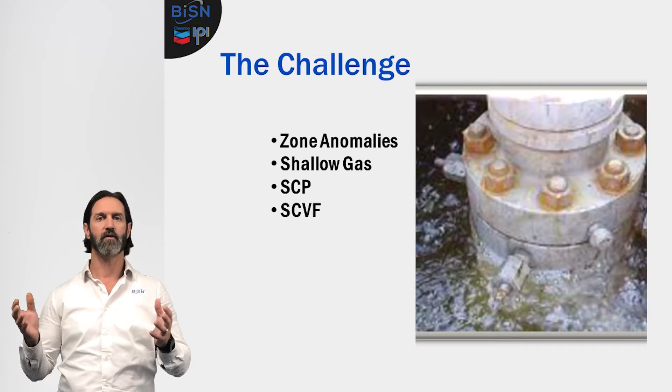And the biggest challenge we were faced with was they were having shallow gas zone anomalies, as they know it, sustained casing pressure, surface vent flow. It's known by many names around the world, but it's basically gas migration or bubbles coming up through a cemented annuli. And we're going to talk today about how we approached this a little bit differently than your traditional methods.

So let's first talk about the conventional method before we get into the novel approach that we're going to speak about today. So conventional methods use long section mill windows, typically plus 100 feet or 30 meters, to enable you to put a 30 meter or 100 foot cement plug in place. So section milling these long windows takes a lot of time, generates a lot of swarf. There's a lot of disposal, so there's costs associated with that as well as HSE hazards.

And there's also a lot of complications that can come along with that. So one, you can get stuck in the hole. The longer the window is, the higher likelihood there is of breaking the blades, sticking something in there, getting extended time, and as we all know, time is money.

So after section milling this long window, the traditional conventional method would be to set a mechanical bridge plug inside the inner casing. So what that does is it's very restricted. A mechanical bridge plug is designed for a certain type of casing, a certain size, a certain weight. It doesn't have a lot of variability with it. It also has limited contact areas.

You're putting a lot of stress on one part of the casing as opposed to extending that out over long regions or long lengths of the casing, which can cause potential casing damage. And you're abandoning this well, you already have gas coming up the backside. The last thing you want to do is cause more problems by damaging your casing.

The last step in the conventional method is putting in cement. And we all know the downfalls of cement as a barrier material or a P&A material. It's very porous, it shrinks, it develops cracks over time, and there's typically a very long wait on cement time, between 12 to 24 hours, depending on what additives you had. So as you see in the photo, you just can't trust cement.

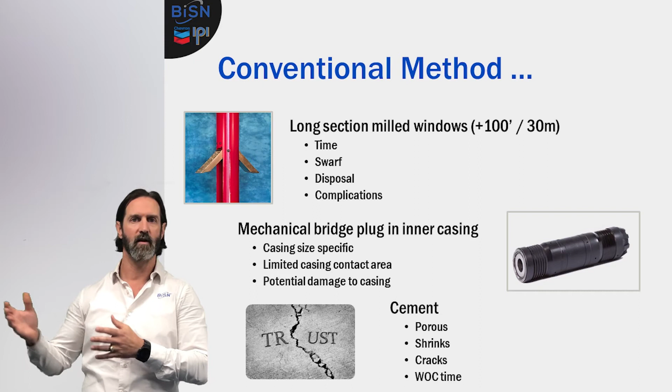Thanks, Jeff. For this P&A campaign, we have used the IPI Permanent Inflatable Bridge Plug, PIBP, and the plug itself consists of three main sections. The top section consists of the releasing mechanism, either left hand thread or shear disconnect, or even a pressure release. Then comes the middle section, which is the tool valving system. It has two spools, or we can even call them valves.

The opening valve, which protects the packer from premature inflation, and also the closing valve, which shuts in on the inflation pressure for a permanent seal. After packer setting, these two valves will provide a redundant seal on the inflation pressure for permanent abandonment.

The third and last section of the tool is the packer element. It's 1.6 meters in length, and its construction features the DuraGrip external anchoring band, the band which we can see on the drawing on each side of the packer element. And this DuraGrip is designed to maximize anchoring for optimal differential pressure holding capability while maintaining an effective bidirectional seal.

Unlike the mechanical packers, which are casing specific, IPI inflatable packers cover a wide range of casing internal diameters. It can be run and also retrieved through restrictions, as the packer itself retracts to its original OD after deflation.

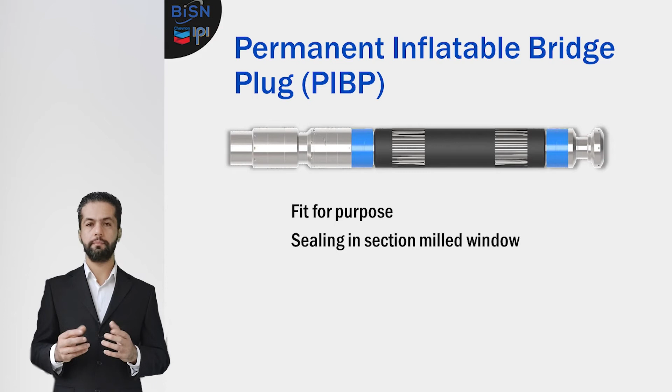Thank you, Adam. So you've heard a little bit about the IPI Packers. The other material that we're going to be using in this novel approach would be the bismuth alloy plugs provided by BISN.

So I said bismuth alloys because we do use bismuth as the main component of these different plugs, the alternative to cement. And some of the unique properties of bismuth is it's a eutectic material, meaning it solidifies and melts at basically the same temperature, a very sharp melting solidification point, meaning it's either solid or liquid. It doesn't go through the gel phase. It also has a viscosity very similar to water and has a very high density with a specific gravity of 10, so 10 times heavier than water.

The combination of those two allow us to run these tools on electric line. You don't have to pump, you don't have to displace. You can go out there with a wireline unit, again, saving cost, less HSE risk, less personnel on location, and then run these plugs and create these gas tight barriers.

They're corrosion resistant, not affected by H2S or CO2, and probably the best quality is they expand like water when it turns to ice when they go from a liquid back to a solid. So remember we talked about the cement, very porous and shrinks on solidification. Bismuth alloys actually expand on solidification and have zero porosity.

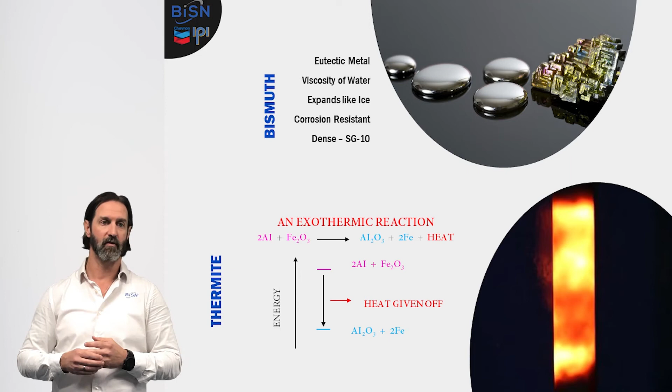The way we get these from a solid to a liquid then back to a solid again is we melt them down using an exothermic chemical reaction, a modified version of thermite, as you can see there. So the best way to describe the BISN tools is like a big candle. The way they're constructed is we have our chemical reaction heater, and then we cast a bismuth alloy on the outside. You can see in this video, the part sticking up is the heater, and the alloy is the silver part that's on the outside.

This is in a piece of glass casing, so you can actually see how one of these tools would set down in your well. So it's like a big candle. The heater is the wick, and the alloy is the wax. What happens when you light a candle? As you can see, the heater starts burning down just like the wick of a candle.

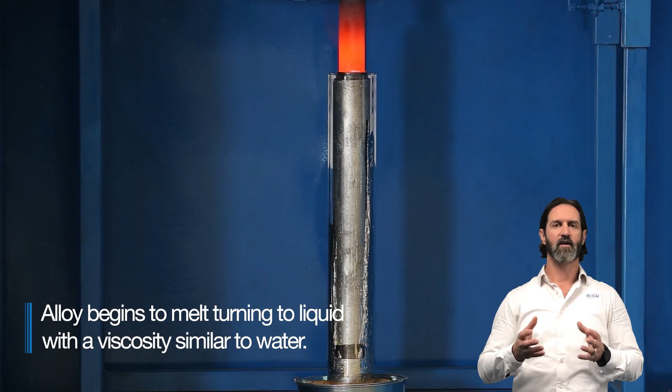Then as it reaches the top of the alloy, that alloy begins to melt and drip down the side of the candle. You'll notice that all of it doesn't run to the bottom. A lot of it stops on the side of the tool, just like a candle would. That's that eutectic property, making it solidify very quickly. It then continues to burn down, continues to remelt until you have all of the alloy left at the bottom of the heater, and that's where your plug is actually being formed.

So in this particular video, the heater is still in place, but for our P&A plugs and what we did in all of these wells for Chevron, we actually extract that heater out of the core when it's in the liquid form, leaving a solid alloy-only barrier, meeting the NORSOK D-010 requirements of a single material plug. Now that you know about the two materials, the technology we use for this campaign, let's talk a little bit about the campaign itself.

So this was done for Chevron, as you're probably aware with George being here, on the Australian Northwest Shelf. It was a total of 34 wells during this campaign. There were 19 onshore wells, and we say onshore, they actually were more like offshore wells because they were on remote Thevenard Island. The logistics were like going offshore as far as getting all personnel and equipment out there. And then another 15 wells on a platform.

Each one of these had zone anomalies and gas migration coming through them. They had limited success in previous campaigns going out with the conventional method that we spoke about earlier. So they chose BISN and IPI to try to optimize the P&A solution and come out with a better result of actually stopping this gas migration.

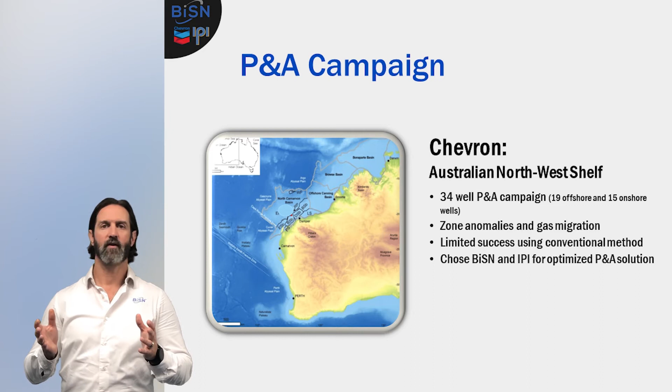So now next we'll talk about the method itself and how we actually got to this solution. We've talked a little bit about the BISN technology itself. We've talked about the IPI packer and the conventional method. We've also in the previous slide gone over what the campaign looked like, how many wells, where they were, what the problems were. So we're going to talk a little bit about the alternative method.

And as you can see on the left-hand side, this is just a schematic representing cemented annuli, with the red lines running through it being gas that's percolating through the cement, basically what we're here to address. On the right, you'll see it is a section mill, much like the conventional method.

However, unlike the conventional method, this window is significantly shorter. We were able to reduce that from a minimum 30-meter window down to a 6-meter window. That 6-meter window was enough to accommodate the IPI packer and the much shortened BISN plug, which is 1.5 meters, compared to the 30 meters of cement required for the conventional method.

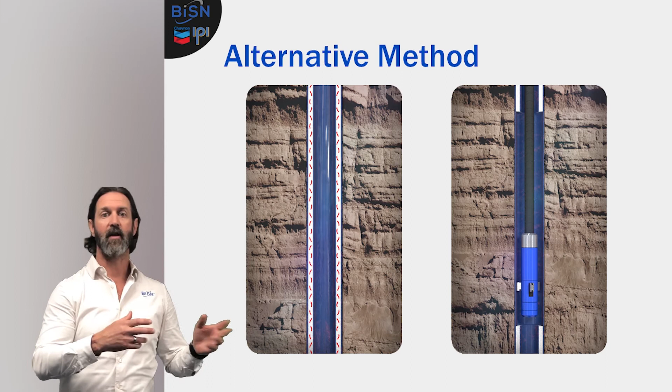So with that, I'm going to hand back over to Adam to talk to you a little bit about the IPI packer itself. Thanks, Jeff.

As it has been mentioned earlier, unlike the traditional method of milling a long section window, then setting a cement bridge plug, this collaborative approach which we have used for this campaign requires a window of just plus or minus 6 meters. Then the inflatable packer can be deployed on drill pipes at the bottom of the section milled window. Then it can be inflated from surface by applying the required pressure sequence.

Once the packer is inflated, we can verify if it's fully set and anchoring by picking up and slacking off weight. And once the packer setting indications are verified, then we finally can release the drill pipes from the packer by rotating the string.

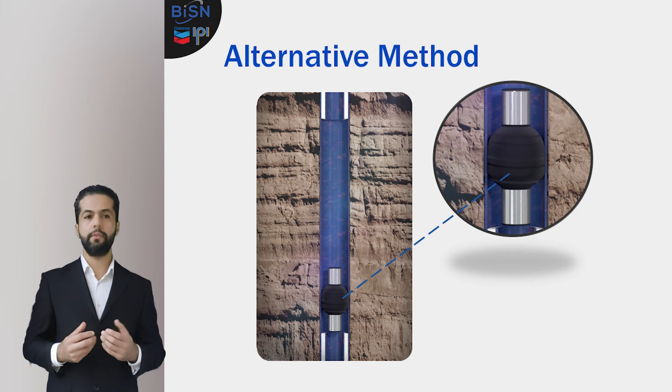We also have the option to deflate the packer prior to disconnecting from the drill pipes if it was, for example, set at the wrong setting depth or for any unforeseen operational reasons. This can be achieved by applying the required pressure to activate the emergency deflate system and deflate the element. After deflation, the packer element will retract to its original OD and it can be retrieved to surface through the section milled window or through any restriction.

All right, so the window has been cut. The IPI packer has been set inside that window, as you've seen. The next step was to take bismuth alloy beads and drop them down the well on top of the IPI packer. So this does a few things. One, it fills in the void. So the IPI packer has quite a long fishing neck.

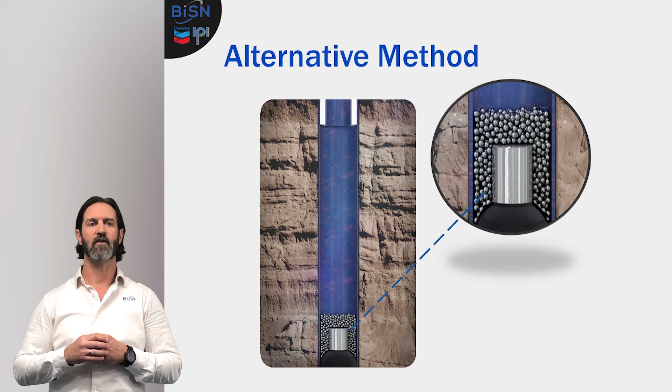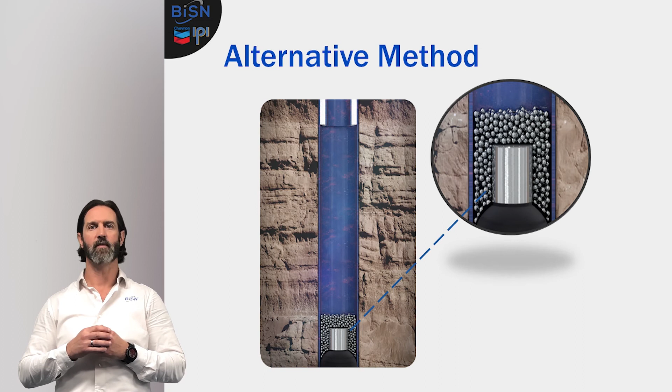And so what we want to do is maximize the alloy we send down in the plug to make sure it's all forming the plug and we don't lose any of that down around the fishing neck of the IPI packer. Second, it protects the IPI packer. So having that standoff there ensures that none of this liquid alloy, which is quite hot, is going to get down to the element and potentially damage the element itself.

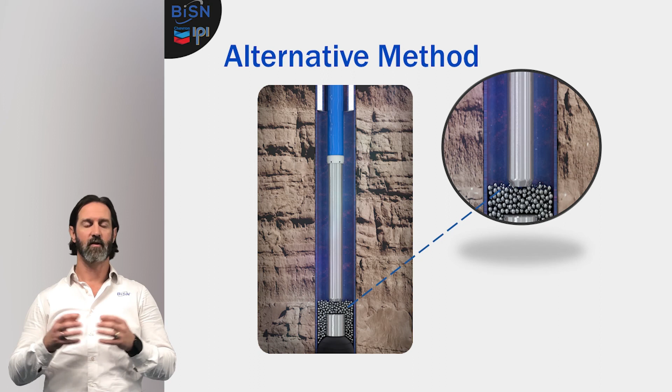With the bismuth alloy beads in place, on electric line, we run in with the tool. Again, this is the construction we talked about with the chemical reaction heater and the bismuth alloy cast on the outside of it. We just run down and set it directly on top of the bismuth alloy beads that we have put in place inside the milled section window area.

Once the tool is in place, you activate the electric line. 240 volts, pulls about 60 milliamps, only need about 15 seconds of power. And then that will melt all the bismuth alloy just like you saw in the video. It will collect around the bottom of the heater. And in this case, as you can see here, we have extracted the heater. That's that black section that's being pulled up into the casing from the plug itself. And you're left with a solid alloy plug covering the section milled window.

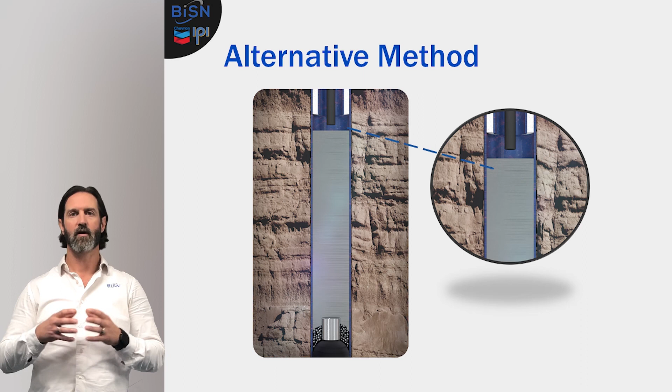So a little recap, we were able to successfully reduce the section milled windows. I did not mention this earlier, but we reduced them from 100 feet down to 20 feet. That's 30 meters down to 6 meters. The reason we were able to shorten it so much is instead of a 30-meter cement plug, we only needed a 1.5 meter bismuth alloy plug.

And again, this is the acceptable practice as was accepted on a recent campaign in Norway by the PSA, Petroleum Safety Authority, according to the NORSOK D-010 standards. So significant reduction in swarf by shortening that window. And overall, it was a big success.

So the IPI packers were all set and tested in each of these wells. The BiSN Wel-lok M2M plugs were tested. This was both a positive and a negative inflow test on each plug successfully. And the shallow gas was isolated in each one of the wells. And as you can see in both of those photos, that's a big thumbs up. And we got a big thumbs up from Chevron, as I'm sure George will attest to.